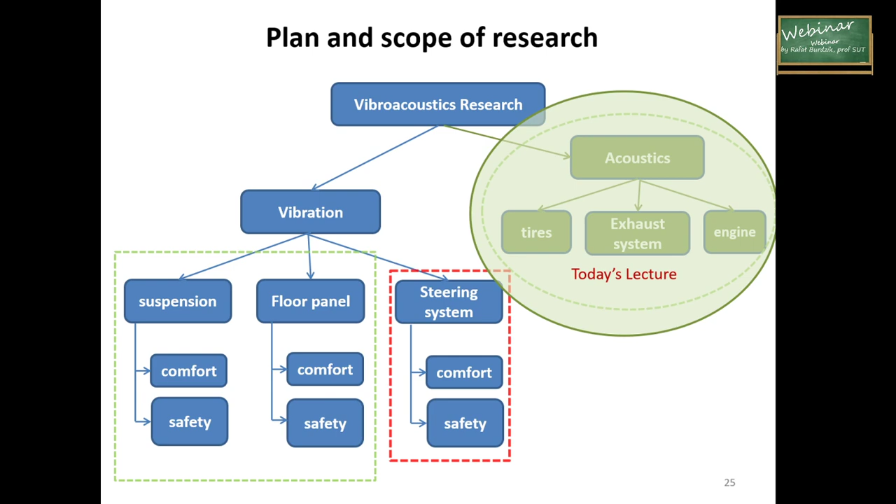As I already mentioned, today we'll talk about acoustic research. The first example is research on the noise level of the tire. Probably one of the most common research topics on tires is research on the noise generated by the tires, and it's becoming even more important every year.

Right now we've even got an index on the noise level. This is an example of a simple methodology and measurement system for measuring the sound level of the tires. We've got the measurement instrument, the SON-50, which is the sound level measurement unit.

But I did use not just the microphone and decibel scales, I also recorded the raw air pressure straight from the microphone, so I also had the waveforms of the sound pressure, not just the sound level. Of course, if we are using an analog device, we also have to use a data acquisition unit when changing the analog signals into a digital system. These are examples of the data acquisition unit.

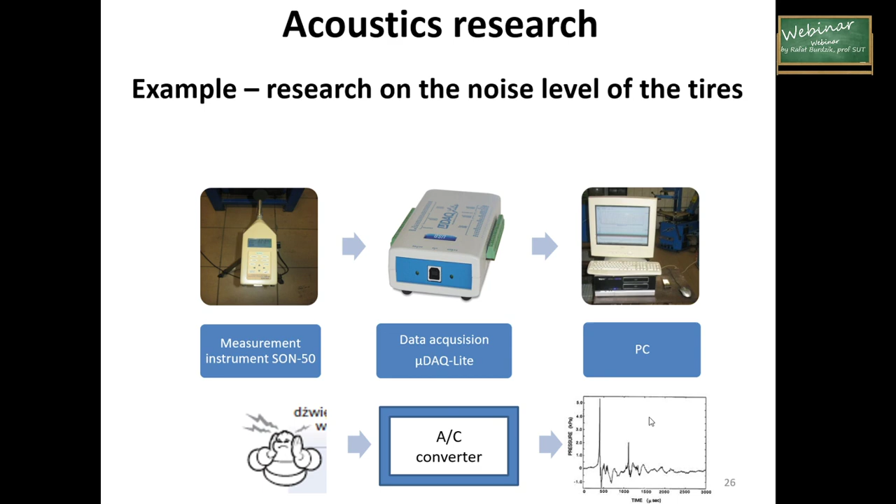So what is the main idea and the main trigger of the research is that the noise of the tires is an extremely important factor when we are talking about the noise of vehicles, which can be considered a comfort factor for the drivers, but also for any other humans around the vehicles. We've got the analog digital converter, and we can analyze the time realization of the signals, not just the level of vibration, and find out how much more information is covered in the waveform of the air pressure, not just the sound level pressure.

So you will see some results. So the conception of the research, the research plan - so we know what we are looking for, and how we will do it.

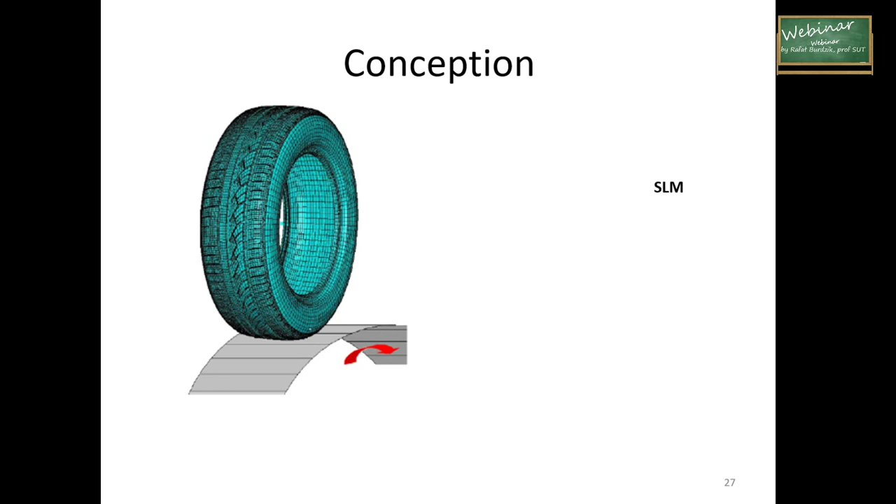So what was the concept of the research? I was thinking about the research based on the typical stands to research tires, which is first when we've got the big wheel and the small wheel, which is the tire, and by generating the movement of the big wheel we are also running the tire, and we can investigate the phenomena in the contact area. Another concept of the research device was to cover the space around the tires with microphones to measure the sound level.

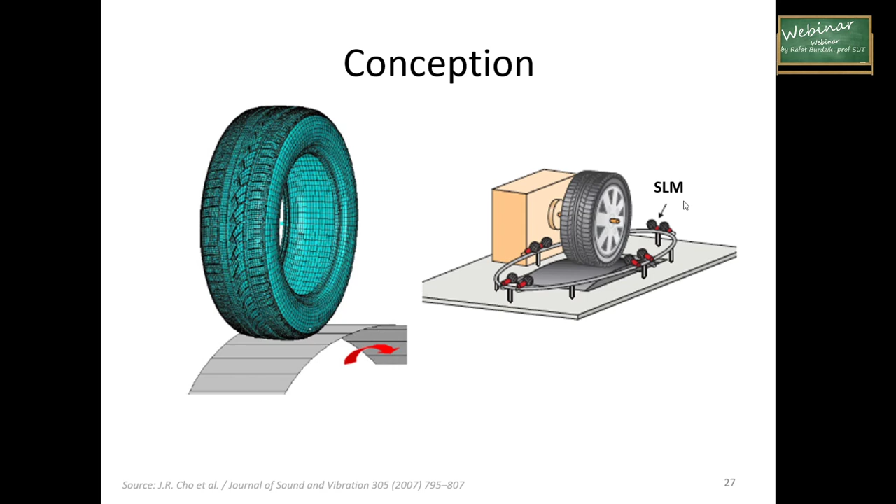Measurement system, yes, so it was the main idea. So I did design, and my students built the test station, which can be seen in our laboratory.

When we've got the simulation of movement of tires on the road roughness, we can even change the structure of the gum, which will show different roughness properties. Then we are able to set different pressure and different force - vertical force can also be changed, and by changing the position of the measurement unit, as you can see...

...we are able to measure the sphere around the tire during operation when the noise level is generated by the movement of the tire. Yes, so it is the idea, and that is how the research was conducted.

Of course, the first important factor of the research was to isolate other sources of noise, and one of the most important sources of noise was the engine, the power engine. As you can see, we also created isolation shields here, which minimize the impact of the noise of the engine. But it can also be reduced by the post-processing method.

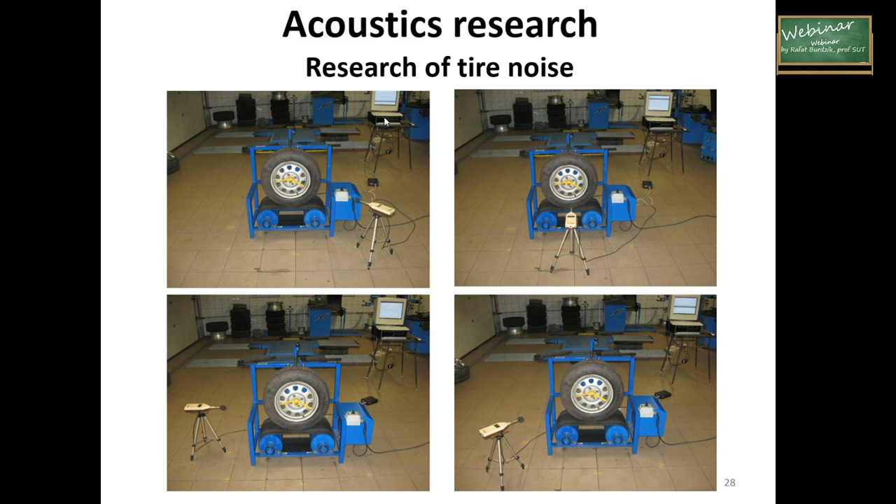So here you can see the measurement system, here you can see the measurement objects, and here you can see the measurement system with the data acquisition unit and the computer to register all signals.

So what were the results of the investigation? First of all, you can see examples of results of the influence of vertical force, which was input into the wheel, on the level of the sound pressure, of the sound level.

Here you can see the sound level in decibels, starting from 62 decibels, and the worst situation is 78 decibels. Points 1, 2, 3, 4, 5 are different measurement points around the tire. As you can see, it is clearly visible how important a factor vertical force is in the generation of vibration. So if we consider the different weight of the vehicle, we have to also consider the huge impact on the noise vibration. So that was the first investigation.

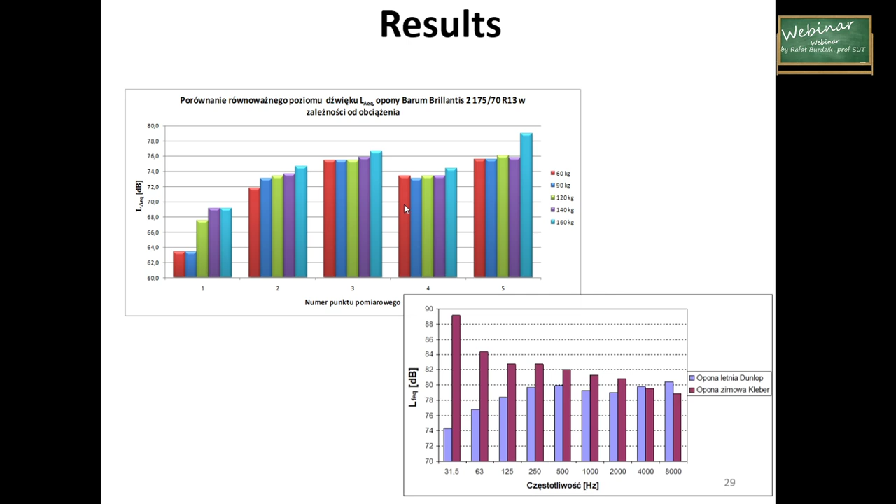The second investigation was on the influence of differences in noise generated by winter tires and summer tires. The summer tire is the blue one. We did consider the frequency bands here - the frequency is the octave filter, so these are the medium frequency bands of the next octaves in our filter.

You can see that in each frequency band, almost each, not just the last two - which are 4,000 hertz and 8,000 hertz - the summer tires are much less noisy than the winter tires, which are the purple bars here.

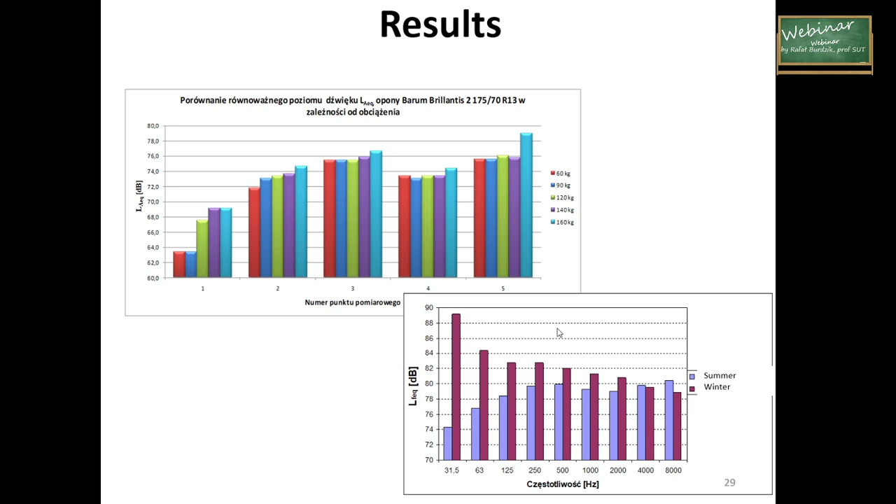But what is interesting, because probably more of you can easily hear the difference when you are changing the tires, is that for some frequencies, the highest frequencies, the situation is changeable - the summer tires generate a bigger sound level than the winter tire. This is probably the result of the construction of the tire. So you can see easily how easy it was to find out the differences by using the vibroacoustics method.

Another experiment was about the sound pressure signal for the tire with different pressures. We set two different pressures inside the tire: one was 100 kilopascal, the second one was 300 kilopascal, and we analyzed what the differences were.

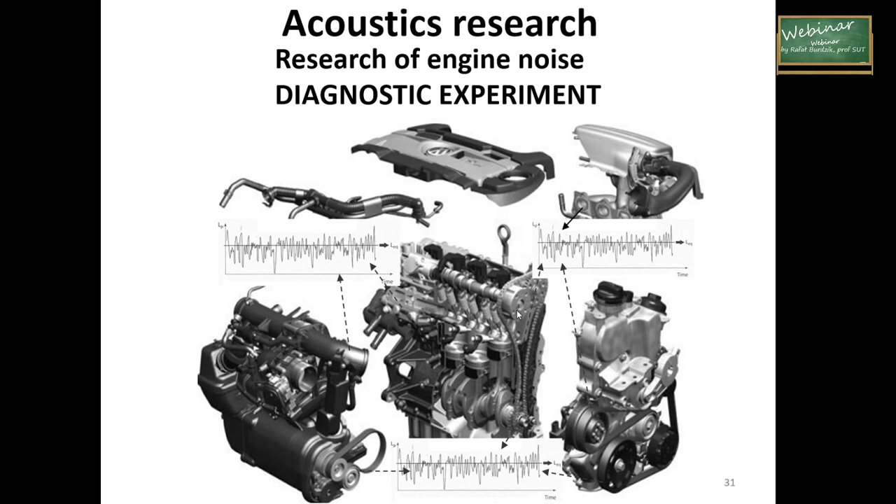It would be best if you could select all those components, because then you could check the technical condition of each single device of the engine. But this is a very difficult task - it was the main idea of the investigation, so we made it a little bit simpler.

First of all, we set the measurement points, because this is important, especially if you are looking for the component of the noise from a selected device of the engine. We tested the vehicles before and after reparation, and set a universal sphere of measurements that were exactly the same before and after reparation, for every single vehicle tested.

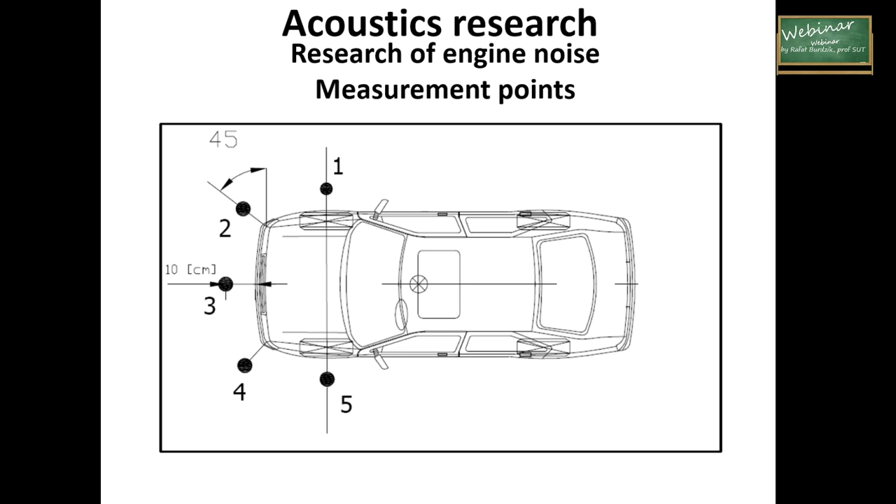So we had 5 measurement points, every one of those measurement points was at a distance of 10 centimeters, and every point was chosen for different types of components of the signals we expected. So what were the results?

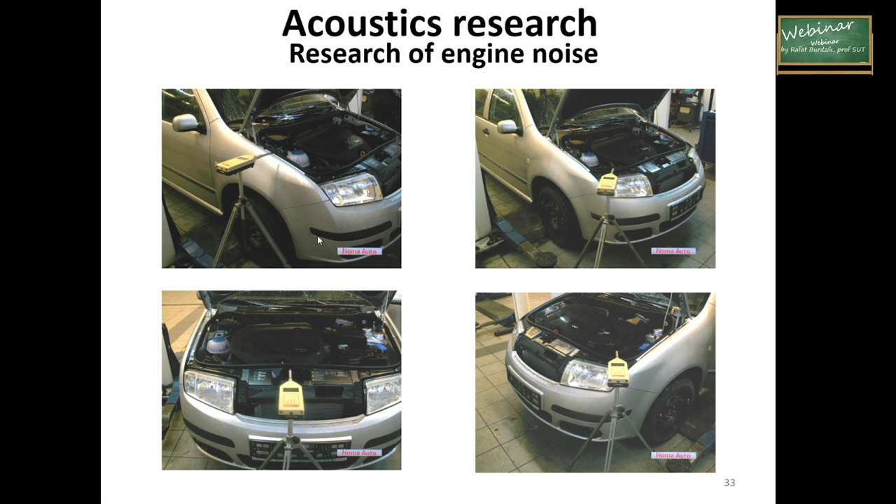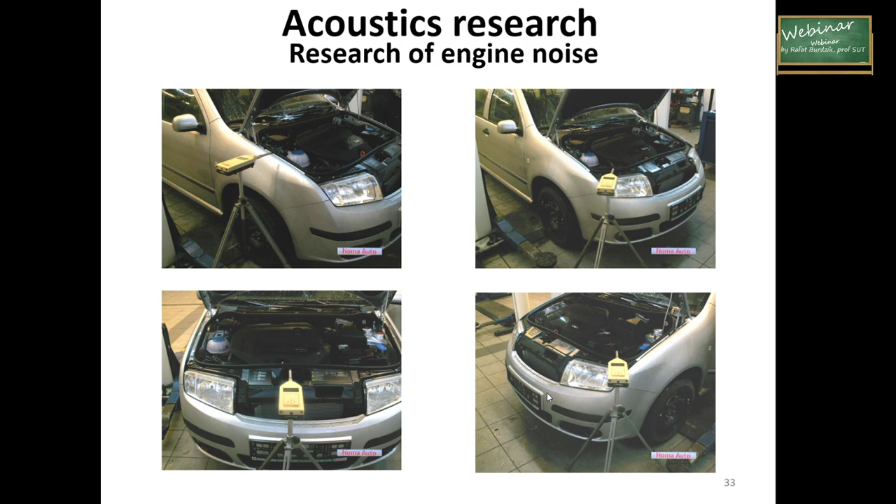These are photos which show you exactly how the research was conducted. This is the vehicle with the engine - the cover of the engine was always open - and here is the first measurement noise, the second measurement noise, the third, the fourth, and the fifth in the opposite way. These were the visualizations of the research.

So now the results - comparing just before and after repair. These are examples of the results. The black bars are before repairs, the lighter ones are after repair, and it is a simple measure of the equivalent sound pressure, sound level - we've got the decibel scale.

As you can see, at measurement point number 1, before reparation the sound level was more than 74 decibels, but after reparation at the same measurement point, we got a measured sound level of around 67 decibels.

So as you can see, it's 7 decibels difference. If we are talking about logarithmic scale and decibel scale, 7 decibels is a huge difference. And in each measurement point, you can see the differences before and after repair.

So what is the first conclusion we can say? The first conclusion is that after repair, non-defected vehicles generate lower sound level, so it is good for the environment. But when we talk about the symptoms of diagnostics, we can say that probably the source of the defect was located close to measurement point number 1. If you consider what devices are located at this measurement point, you will easily find out what was wrong.

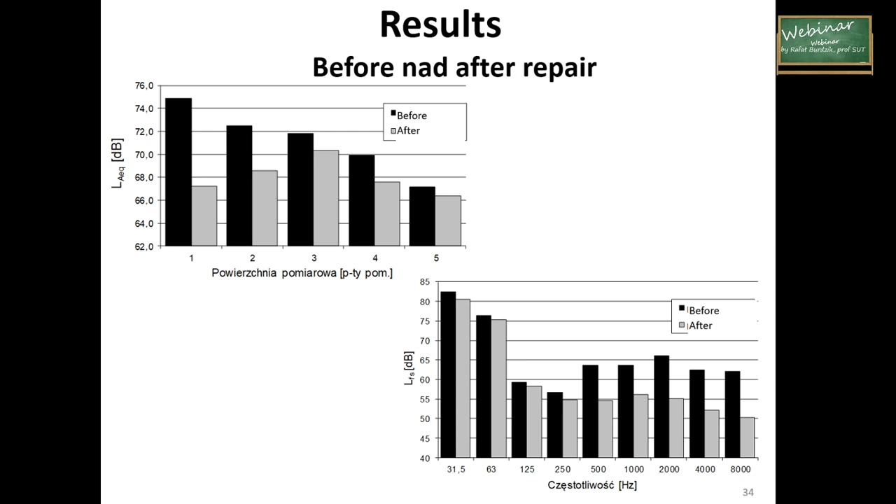So this second stage of investigation is also very important. First you are able to find out the location of the defect. Second, you can find out which devices could be defected, because these are the frequency bands most sensitive to the defect. So these are examples of how you can use acoustic signals in research on technical conditions. And of course, if we go further with the analysis, the technical condition of these devices is extremely important for safety and comfort.

Another example is the research on exhaust systems measuring points, and there are two directions of research. First is about the volume of noise generated by vehicles, which is extremely important for the environmental impact of transportation, but we could also consider the volume measurements as a symptom of diagnostics when considering the technical conditions of the exhaust systems. So it is two directions.

So we set different measurement points, starting from the beginning of the exhaust system. We set 4 measurement points there, and also the last one at the end of the exhaust system where we also check the condition. That is how we were able to locate defects all the way from the beginning of the exhaust system to the end.

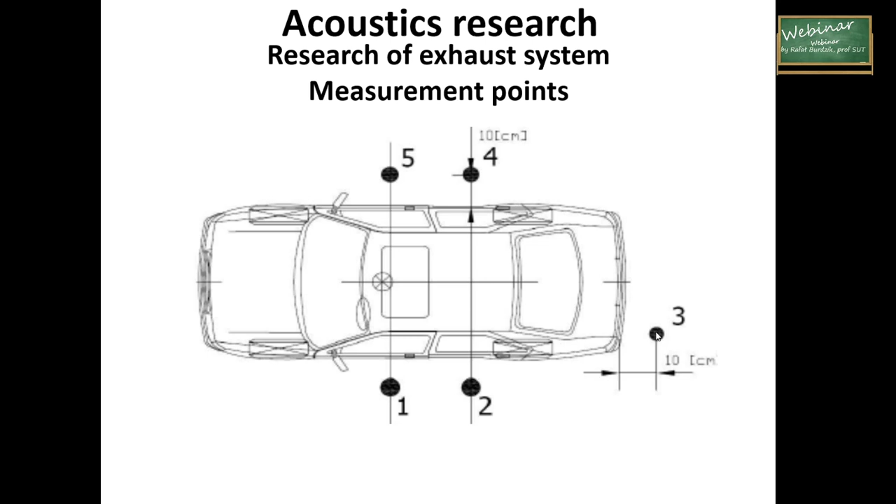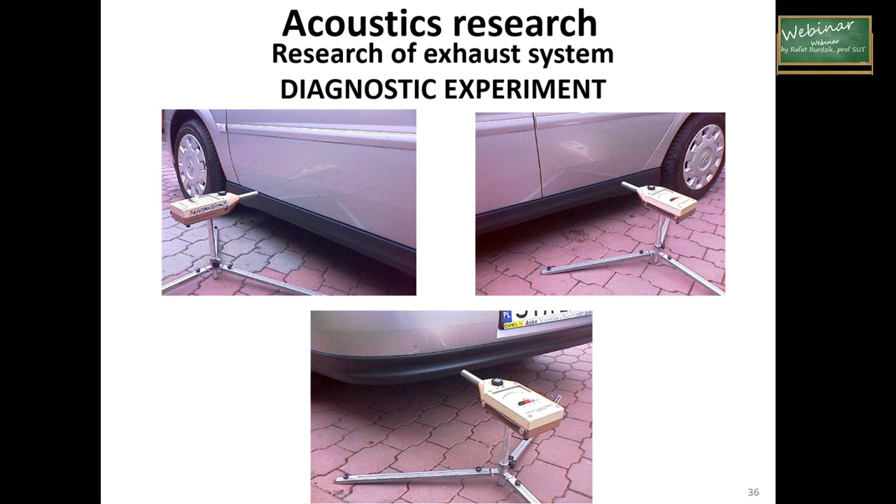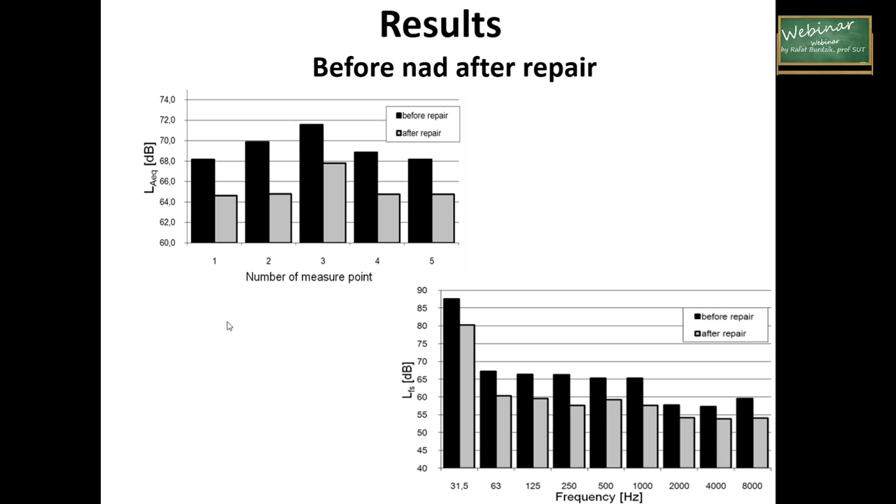And similarly, we go into the analysis of frequency distribution and octave filters. You can again check the differences in each frequency band, and as you can see for these 2 frequency bands, the differences are biggest - 250 and 1000 frequency. That is how you should look for the devices or elements of the exhaust system which were defective, based on the analysis of such dynamics. It is the same situation, and you can easily see how clearly you can find the symptoms in the measurement system. And we are talking just about the sound level, not about the air pressure measure and the raw signal.